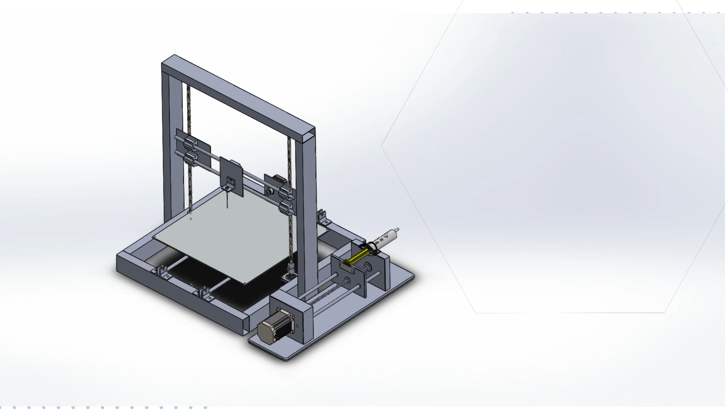Our group presentation name is Hydrogel 3D printer. I will present about the introduction.

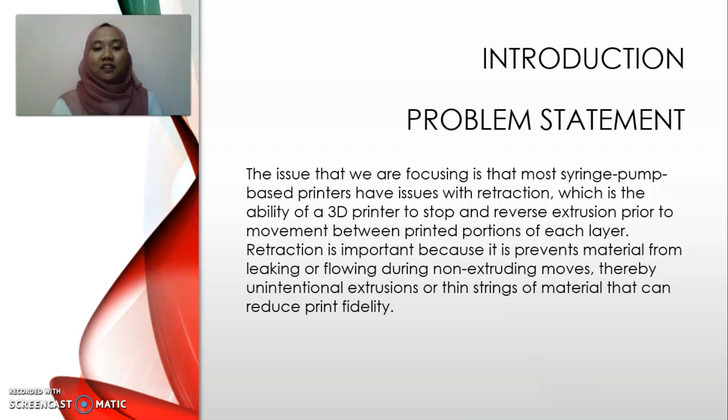First, problem statement. The issue we are focusing on is that most syringe pump based printers have issues with retraction, which is the ability of a 3D printer to stop and reverse extrusion prior to movement between printed portions of each layer. Retraction is important because it prevents material from leaking during non-extruding moves, thereby preventing unintentional extrusion or thin strings of material that can reduce print fidelity.

Next is objective. First, to help engineers in the bioengineering field to produce a 3D printing machine for bioengineering application at an affordable price range.

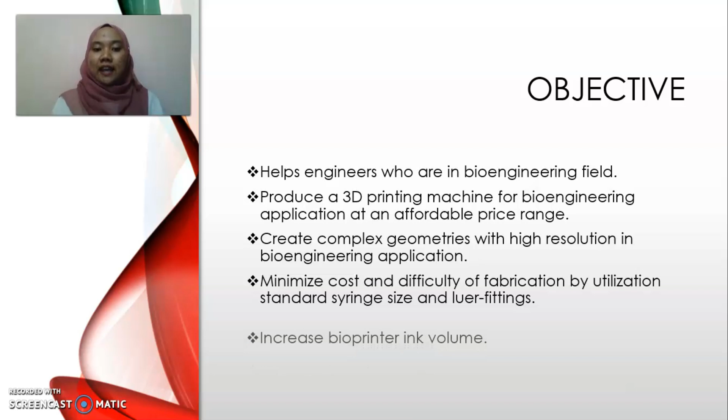Next, to create complex geometry with high resolution in bioengineering applications. To minimize cost and difficulty in fabrication by utilizing standard syringe size and luer fittings. Next, increase bioprinter ink volume. And lastly, increase performance of the hydrogel extruder by enabling use of smaller size and increased speed.

Scope. This hydrogel 3D printer will be targeted to researchers, students, and universities for their experiments, research, and studies. Furthermore, this printer will be targeted for newly started companies so that they don't have to come up with a huge capital since it is going to be cheap and affordable.

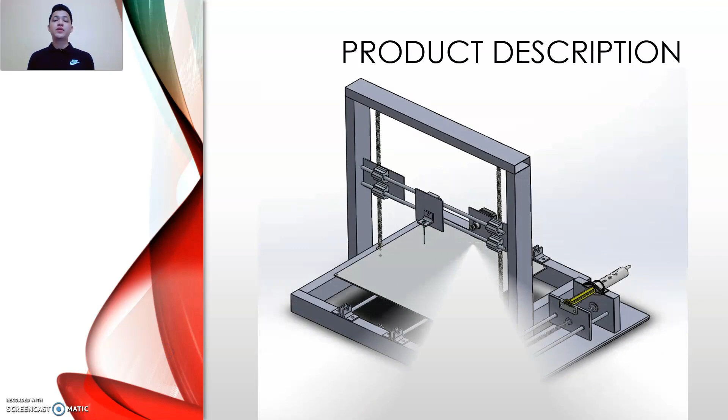For the product description, our hydrogel 3D printer is constructed by two main parts. The first part is the body part. The body part is the main part that functions to move the nozzle along three axes, X, Y, and Z.

The movement is powered by the NEMA 17 stepper motor, 8mm threaded rod, and LM8UU as the linear bearing and timing belt.

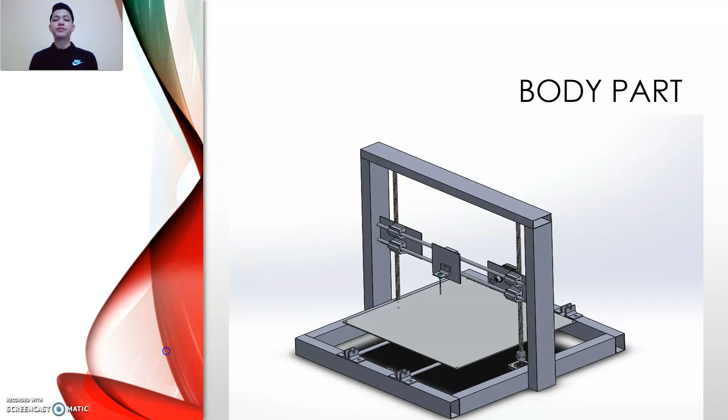The second part is the syringe pump extruder. This functions to extrude the hydrogel that has been filled inside the 60cc syringe and pushed by the force of the NEMA 23 stepper motor.

Our hydrogel 3D printer design is basically based on the DIY 3D printer. The only difference is the material that is extruded and the extrusion mechanism.

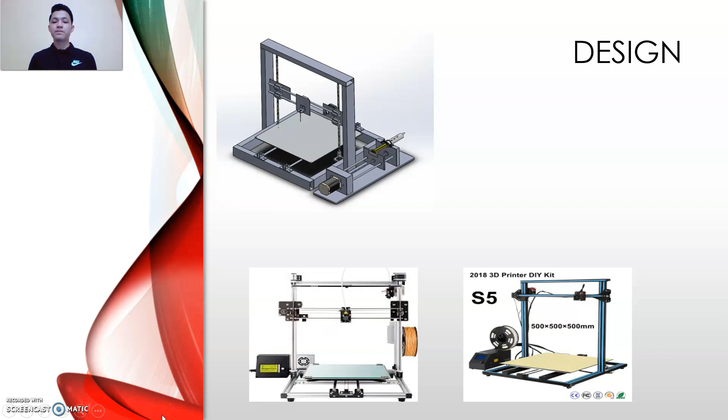Based on this simulation, this is basically how our 3D printer works. At every end of the axis, we plug in a micro switch as the end stop. Software such as Marlin firmware and Pronterface software is used to convert the CAD file into an STL file and produce the printed product.

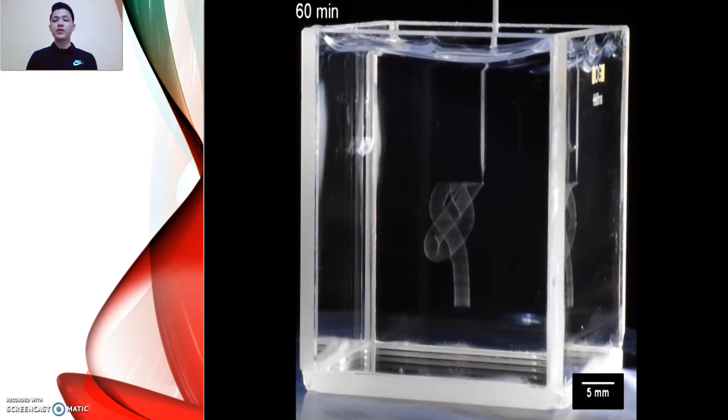Due to the hydrogel being easily ruptured, the hydrogel is extruded into a support bath which consists of semi-solid gel. This is to support and hold the hydrogel into the desired shape.

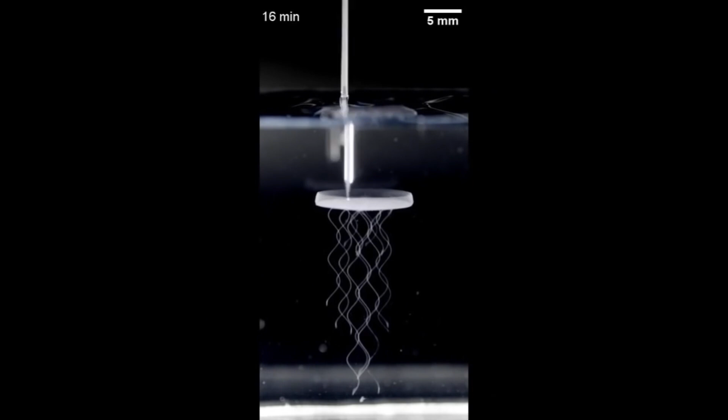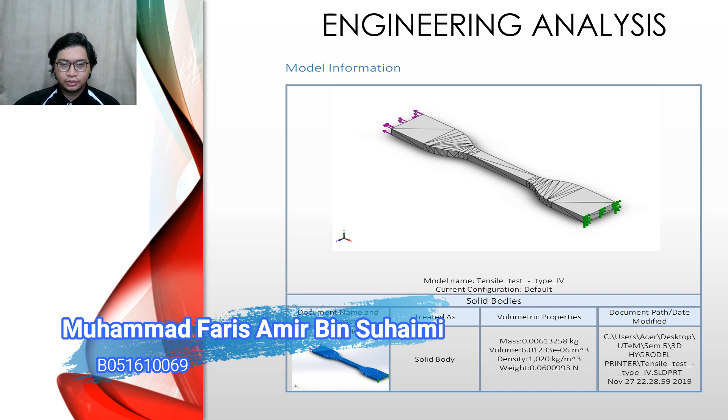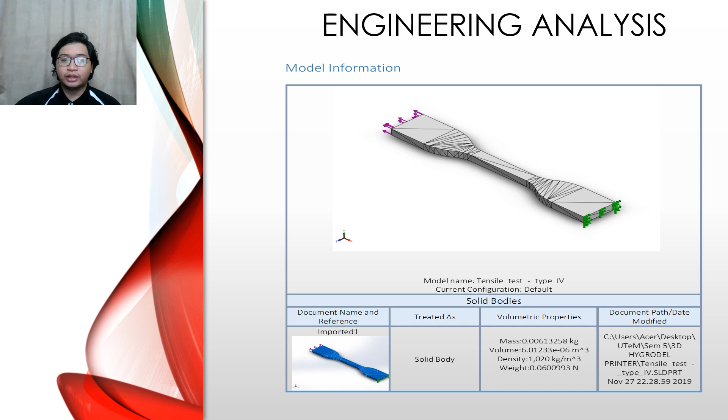For engineering analysis, we run a dog bone test, or tensile test, on a standard dog bone shape made up of ABS. For this, we did not use PLA because of insufficient information on the mechanical properties of PLA, which meant the test could not run the simulation for the tensile test.

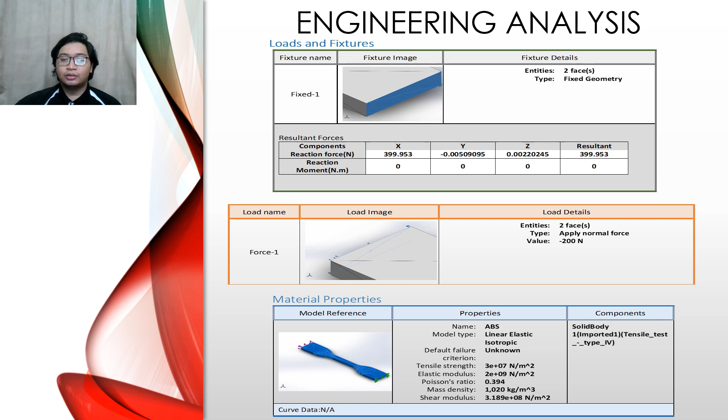ABS also shows that it possesses nearly the same mechanical properties as PLA. For this test, we fixed the dog bone at the end point of the bone, while we applied 200 Newton force on the other end point of the bone.

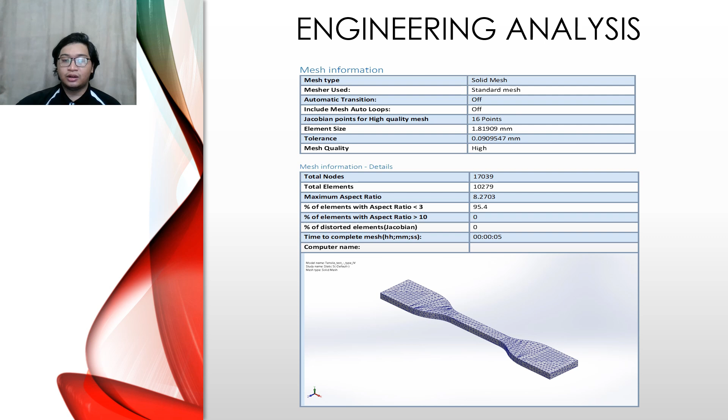From the table, we find that a high quality mesh also means there is an optimal balance between the computational cost and the level of fineness achieved. A low quality mesh will not only result in inaccurate simulation results, but might even cause the solver to produce an error due to instability.

For the hydrogel engineering analysis, hydrogel is a newly synthesized material which we cannot finalize its mechanical properties. Some past research already came up with the mechanical properties but it is still incomplete to run the tensile test.

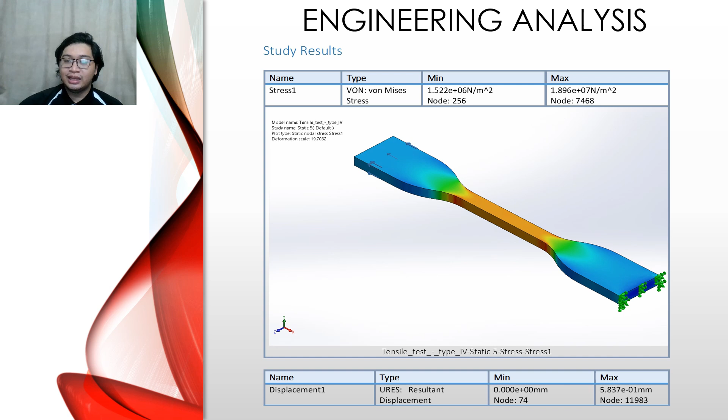For further engineering analysis, we may conduct this analysis after we succeed in fabricating our 3D printer and finally print the hydrogel into a dog bone shape to test the tensile strength manually.

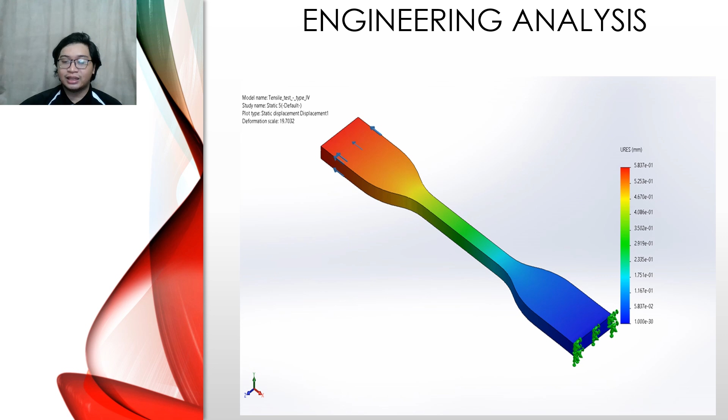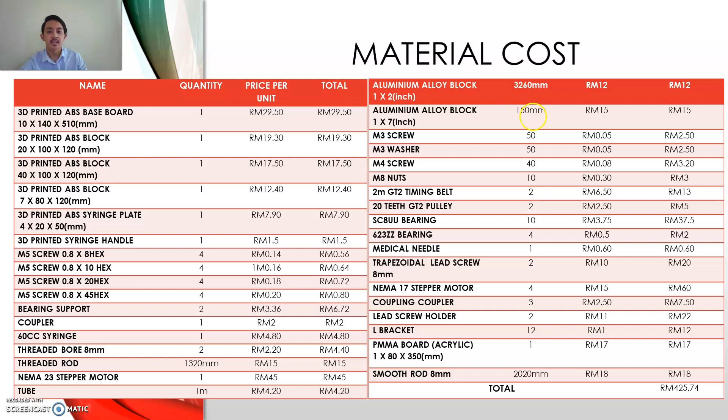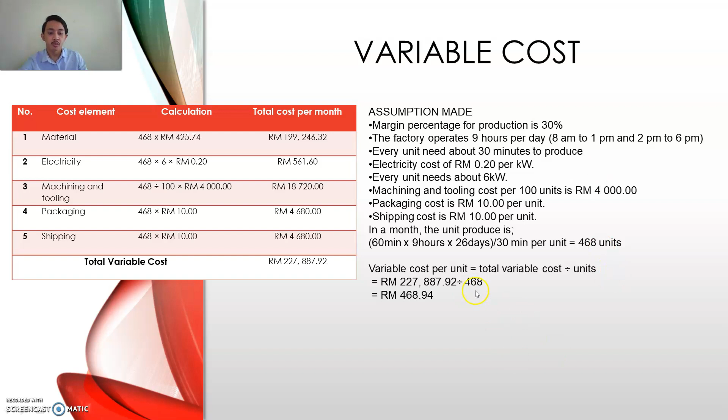This is the total variable cost to produce the hydrogel 3D printer for a month. I will continue with the sales price per unit.

As you can see, the cost for a single unit is 519 ringgit, but I'm taking a 30% profit margin. So the total selling price for our hydrogel 3D printer is 674 ringgit.

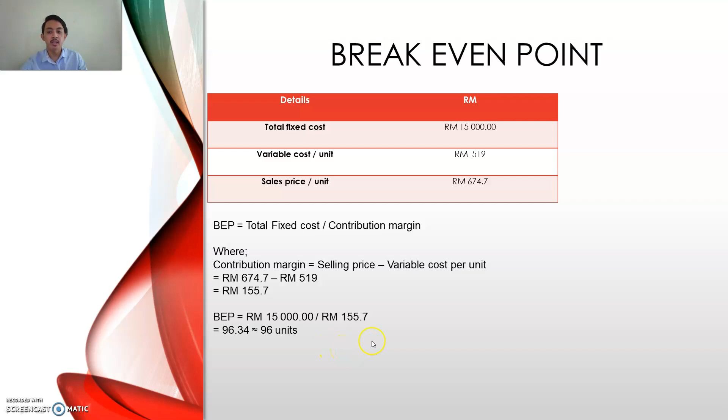And lastly, this is the break-even point. This calculation is the contribution margin, which is used in the BEP formula, and we get 96 units for BEP. It means that this is the minimum number of units the company needs to sell per month to ensure the company can be sustained.

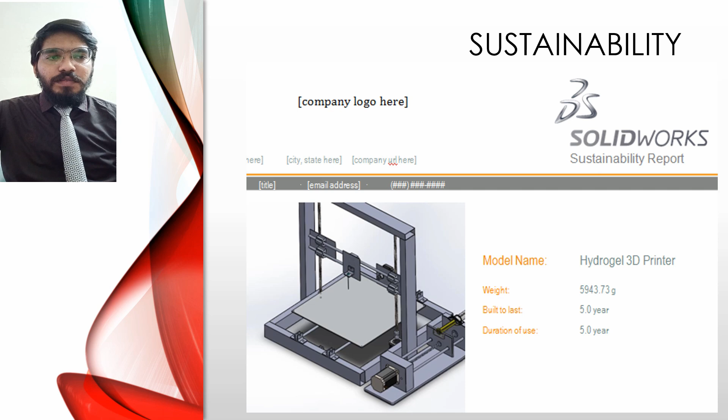As we can see, this is the sustainability report that has been interpreted by SolidWorks software for our project. The weight of our project is approximately 6 kg and it is built to last for 5 years. These are the data of assembly process, use, transportation and end of life of our project.

The next slide refers to the environmental impact calculated by the CML impact assessment methodology, which refers to the data of carbon footprint, total energy consumed, air acidification and water eutrophication.

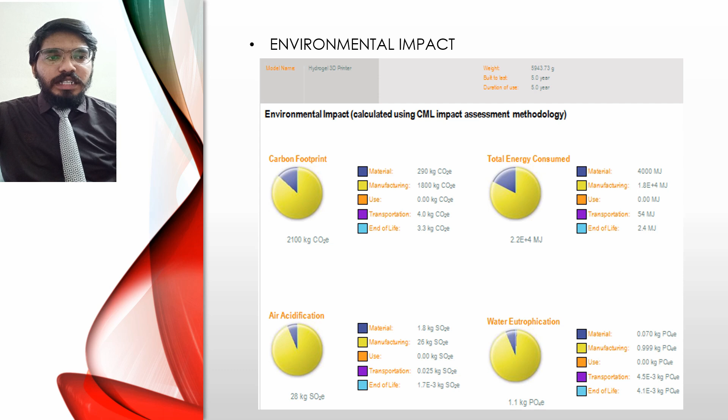In our project, we have applied DFMA to the syringe pump component, where the number of parts of the component has been reduced after applying DFMA.

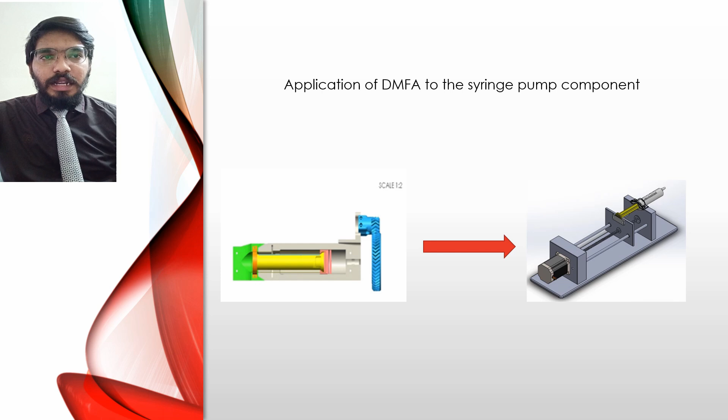Next, we can see that our newer design of the project is more sustainable compared to the older one.

As for the conclusion, we have learned so many things during this project throughout the semester. With the enormous amount of help from our supervisor, we as a team believe that we have done good work and excellent cooperation was achieved.

We have completed a successful project by successfully creating a functional digital prototype. We have found that success in manufacturing requires continuous development and improvement in how products are developed and produced. The implementation of DFMA is very effective and gives us positive results. All the objectives were achieved: to produce good quality product, reduce part counts, reduce assembly time and minimize costs.